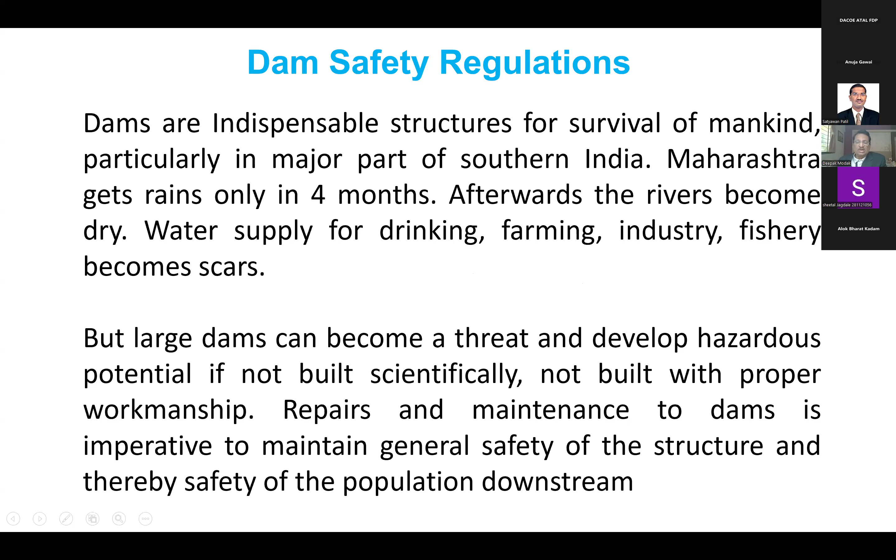So far as Maharashtra is concerned, the Dam Safety Organization, DSO, situated at Nashik, headed by a chief engineer, is a crucial part of Maharashtra's Water Resources Department, operating under the Chief Engineer, Hydrology and Dam Safety, at Jalavidnyan Bhavan, Dindori Road, focusing on inspecting large dams, analyzing safety measures and safety measuring instruments, and developing emergency plans to ensure water security and public safety.

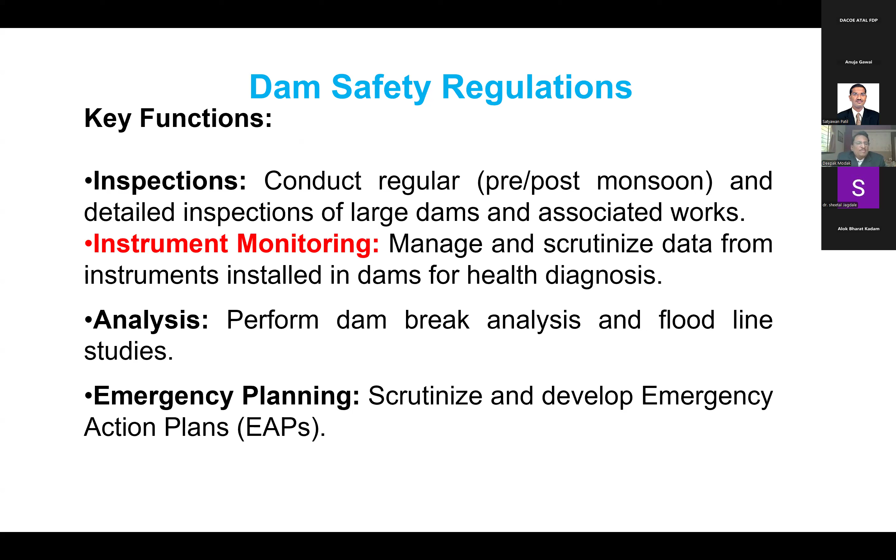The key functions are: inspections, that is, conduct regular pre and post monsoon and detailed inspections of large dams and associated works. Then instrument monitoring, that is, manage and scrutinize data from instruments installed in dams for health diagnosis. Analysis, perform dam break analysis and floodline studies. Emergency planning, scrutinize and develop emergency action plans.

So dam break analysis predicts the devastating flood wave from a failed dam, involving simulating the dam's breach size, shape, timing, etc., and routing the resulting outflow hydrograph downstream using software like HEC-RAS to create inundation maps, assess risks, and develop emergency plans.

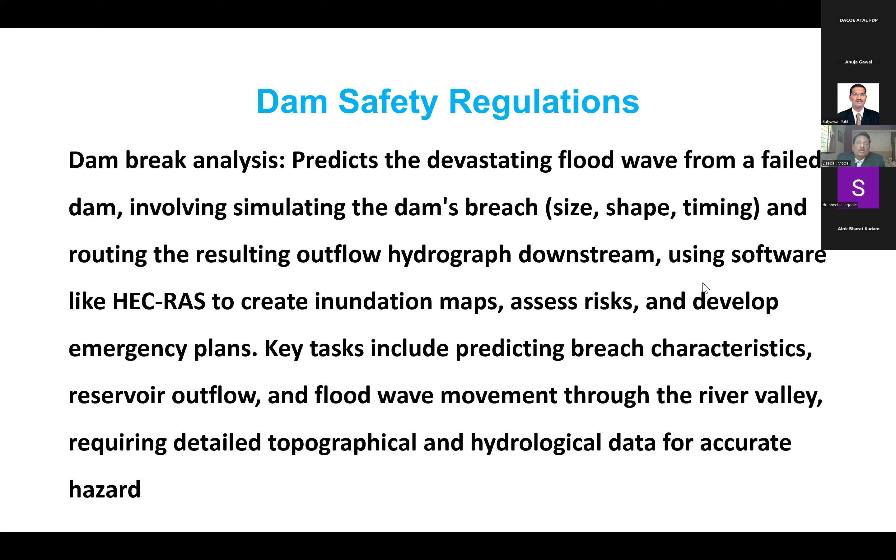Key tasks include predicting breach characteristics of reservoir outflow and flood wave movement through the river valley, requiring detailed topographical and hydrological data for accurate measure of the hazard. The Dam Safety Act, now particularly we would discuss about this.

The Dam Safety Act 2021 is an Indian law established to ensure the safe functioning of dams by providing for their surveillance, inspection, operation, and maintenance, preventing dam failure disasters, and creating strong central and state level institutional framework, including the National Dam Safety Authority, NDSA, and state dam safety organizations, SDSO, to enforce standards and policies.

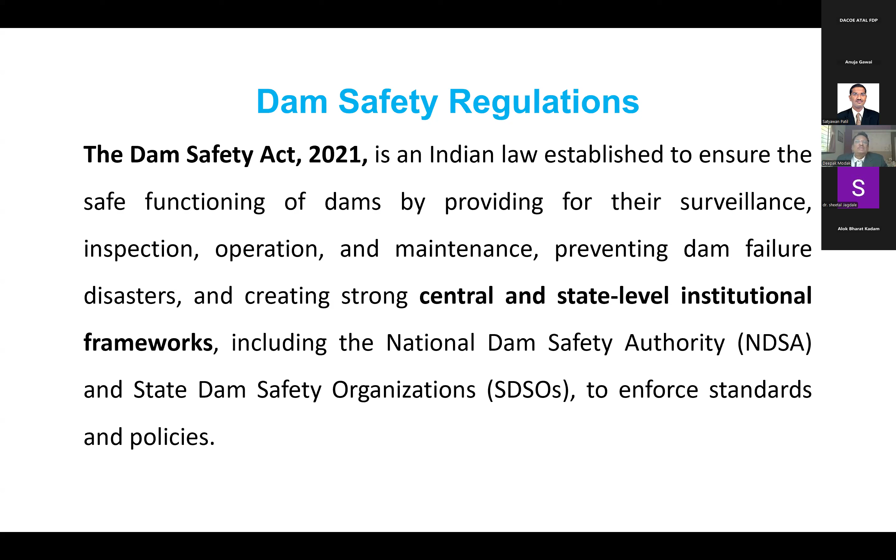The act was enacted in December 2021. It mandates owners to have operation manuals, emergency action plans, and outlines roles for national bodies like the National Committee on Dam Safety, NCDS. State level committees on dam safety oversee state dam safety. The State Dam Safety Organization, SDSO, conducts surveillance, inspection, and monitoring.

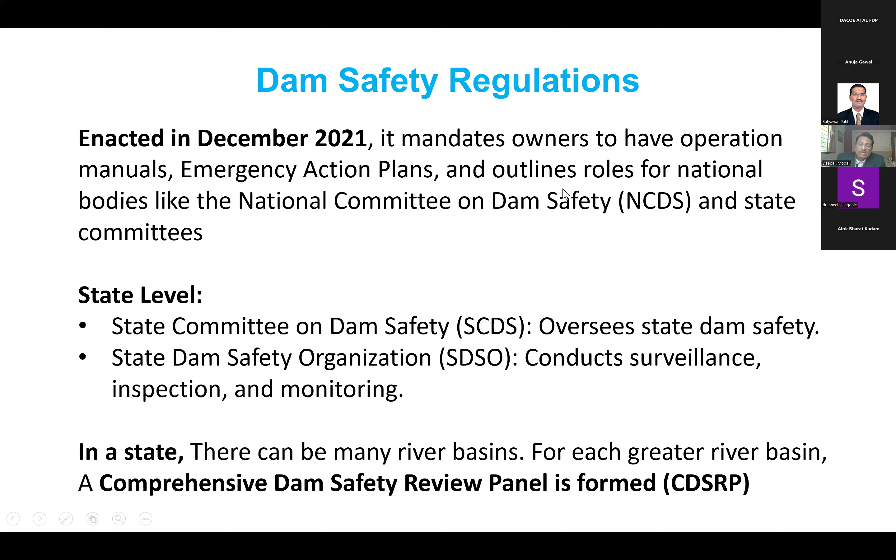And in a state, there can be many river basins. For each river basin, a comprehensive dam safety review panel is formed, that is CDSRP. So river basin corporations: there are 6 river basins in Maharashtra, namely Krishna, Godavari 1 and Godavari 2, since Godavari basin is very large, starting from Nashik and downwards, then Tapi, Konkan, and Vidarbha. For each corporation, a separate CDSRP is formulated, particularly for Maharashtra Krishna Valley Development Corporation.

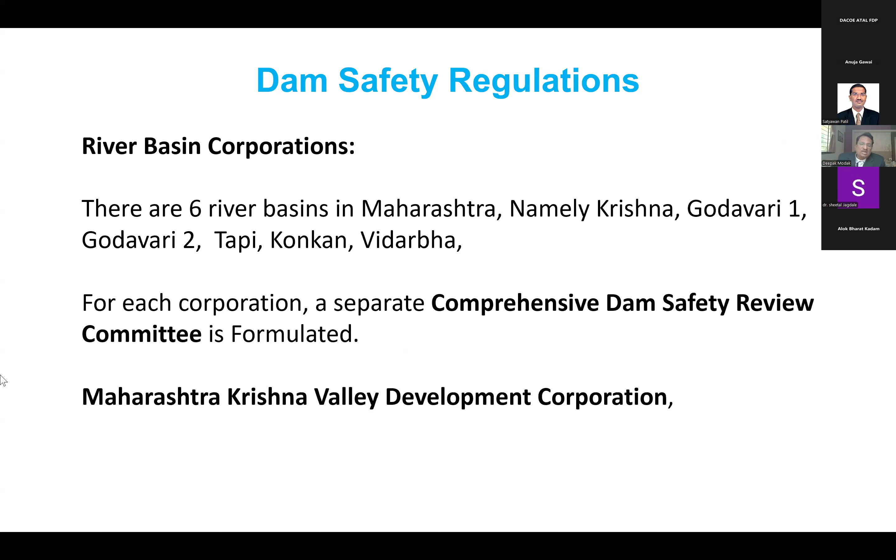For Maharashtra Krishna Valley Development Corporation, the CDSRP is chaired by Shri D.N. Modak, that's me. I.S. Chaudhary, retired chief engineer, is a member. Dr. Sharad Govind Joshi is a former principal of Bhoomaraddi College, Hubli, and he was also associated with Koyna project when we did the strengthening of the overflow section. He was working as executive there.

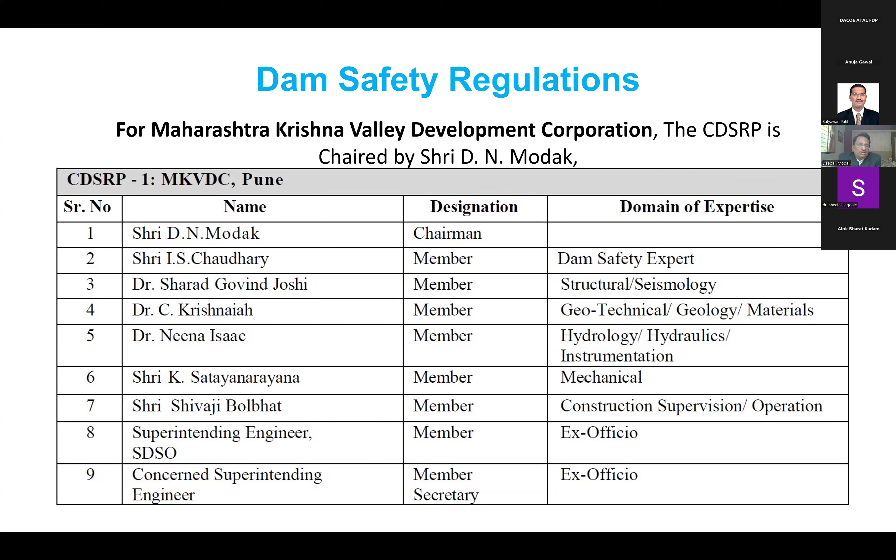Dr. C. Krishnaiah, geotechnical and geology. Dr. Neena Isaac is hydrology and hydraulics. Shri Satayanarayana is member mechanical. Shri Shivaji Bolbhat, again retired chief engineer of our state, construction supervision activity. Superintending engineer SDSO ex officio, and the concerned superintending engineer of the dam for which we are going for inspections will be the member secretary.

So what are the dam safety regulations? Safety is a concern of large and specified dams. Now, what are specified dams? It is clearly mentioned in the Act. As per Dam Safety Act 2021, any dam over 15 meters high is termed a specified dam. Also if crest length is greater than 500 meters, reservoir capacity is more than 1 million cubic meters, maximum flood discharge is greater than or equal to 2000 cubic meters per second, or it has difficult foundation problems or is of unusual design.

Now I have added one more category, that is, it has a high hazard potential. I will quote the example of the Thoseghar MI tank, which does not meet any of the criteria mentioned above, but there is the Thoseghar waterfall near Satara, and in monsoon many people come to visit this waterfall, and, sorry to say, drink and do funny things, and they encroach into the Thoseghar spillway.

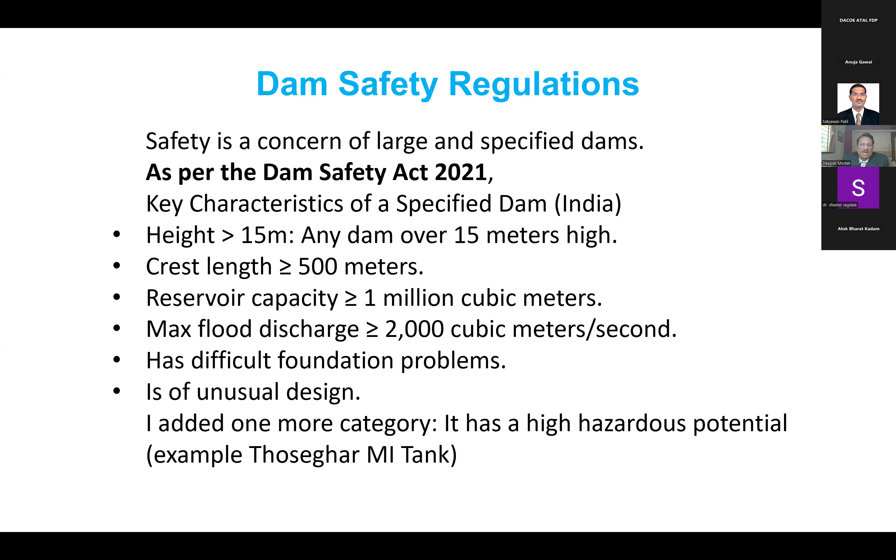As per different categories of dams like major, medium, minor, or small dams, the Central Water Commission has specified at least 2 inspections of each dam annually, that is pre-monsoon inspection and post-monsoon inspection. The inspecting officer is specified as per the category of the dam. The dam can be an earthen dam with central spillway, side spillway, or separate saddle spillway. It can be a concrete dam, a masonry dam, or a composite dam.

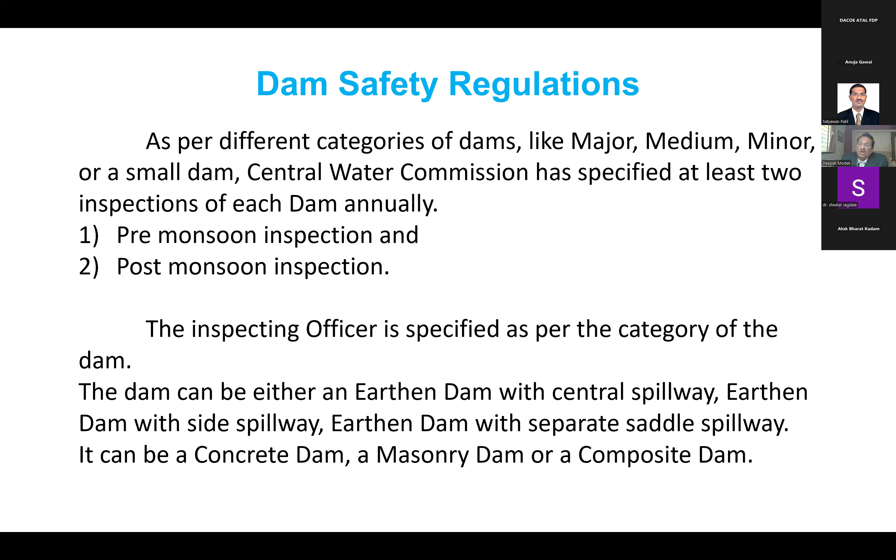So as per its type, the following components are necessarily inspected. Downstream drainage. Now downstream drainage means surface drainage, cross drainage, and toe drainage. The surface drainage here, I mean, is the rainfall drainage. That is, in the rainy season, the rainwater should safely be drained from the downstream drainage. For that, longitudinal and cross sloping drains are constructed.

There should not be any vegetative growth. There should not be any obstruction like fallen rocks or other debris. They should be flowing freely and draining the surface water in the rainy season or during heavy storms and heavy floods.

Then surface drainage on the downstream slope. This is specific. Even in the rainy season or after the rainy season, you should not see any wet patch or any water flowing out of this downstream slope from any jet or any stream. If you see it, you know there is a piping phenomenon taking place in the embankment. So you should take care of that. So this downstream slope drainage is different from the downstream surface drainage during the monsoon.

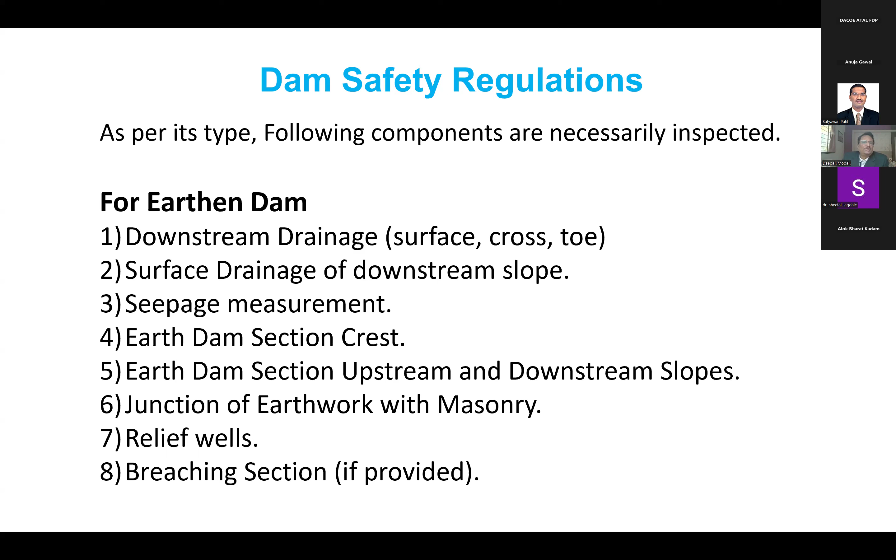And a breaching section. Everybody being from the engineering faculty, you know what a breaching section is. You must inspect it every time you go, that it is intact and its level is properly maintained. Then for gravity dams, keep a watch on foundations from the foundation gallery or exposed rocks downstream. There should not be any cracks or oozing or such deformations seen in the foundation.

Then the body of the wall of the NOF, non-overflow dam, and spillway. This spillway has got non-overflow sections on both sides. So we must see that there is no water jetting out, no bulging or anything like that, and no cracks are seen. And the structural performance of the NOF and OF portions of the dam and foundations.

Spillway gates. You should check the rubber seals, trunnion, chains, ropes, whether they are properly greased or not, and that they correctly open and close. This is, of course, a ritual practice of inspecting the gates every time before pre-monsoon inspections. You should have a separate generator provided in case of power failures. Then the spillway bridge, hoist bridge, trunnion level bridge and catwalks. They should be intact and accessible. The inspecting person should reach there and view the components.

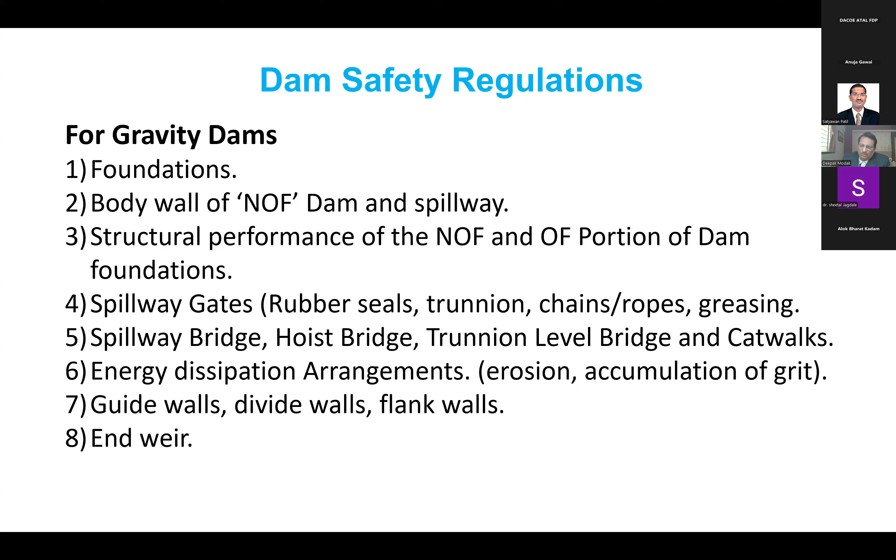So we make it a point that every 3 years, this stilling pond is totally drained and it is inspected and videographed again. And then if any abnormal erosion is seen, then we take care of repairing those. So few dams have a few specific problems, so we must take care of all that. So hydraulic performance of energy dissipation arrangement should also be observed.

Instrumentation installed and observations. So what normally instrumentation we should see on old dams, particularly the new dams, if they are gravity dams or the spillways of masonry or concrete type, we have thermometers and all, stress and strain meters, but they have significance for the first 5 to 6 years. Afterwards, the temperature in the body of the dam is maintained, and we should not bother about that.

But for regular inspection, we should take care of the tilt meter, which shows the tilt of the dam. You know, when the dam reservoir is full, the dam has a tendency, if it is an elastic dam. I'm not speaking about the earthen dams or plastic dams. The elastic, that is masonry and gravity and arch dams, we don't have any arch dam. So masonry and concrete dams.

So they have a tendency to bend slightly, tilt downstream when the reservoir is full, and bend slightly backwards when the reservoir is empty. So this allowance of the tilt is measured and is specified. So you should not see any additional tilt in the tiltmeter during the monsoon or even in the dry season. So this record is permanently maintained and the tilt meters are permanently repaired and maintained. Then instrumentation,

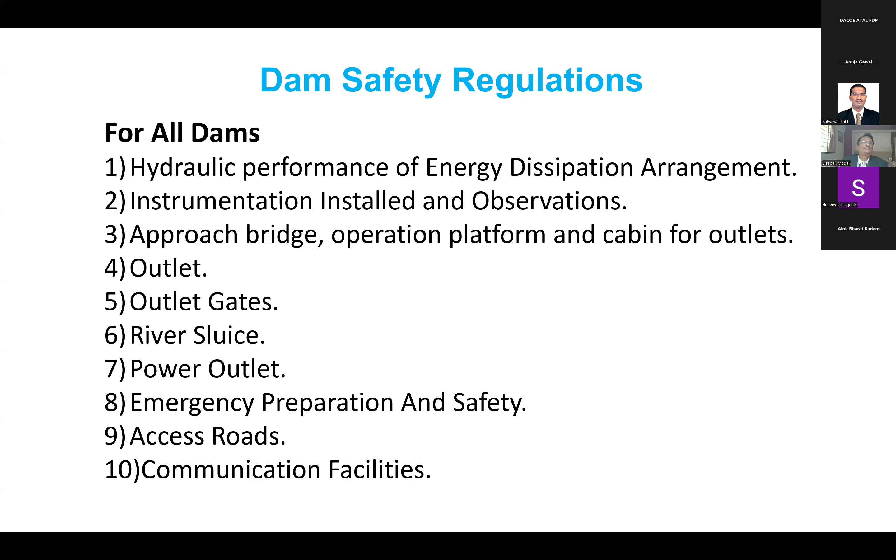Then hydraulic risk assessment, I will come to this now, the second part of our lecture. All dams during the design phase are designed for all sorts of hydraulic risk resistance. Everybody knows about it. So there is hardly any problem arising out of hydraulic risk. The hydraulic risk for dams arises only during exceptional flood conditions. Similarly, during high floods, the population downstream on the river banks is also affected. This is because of the following factors.

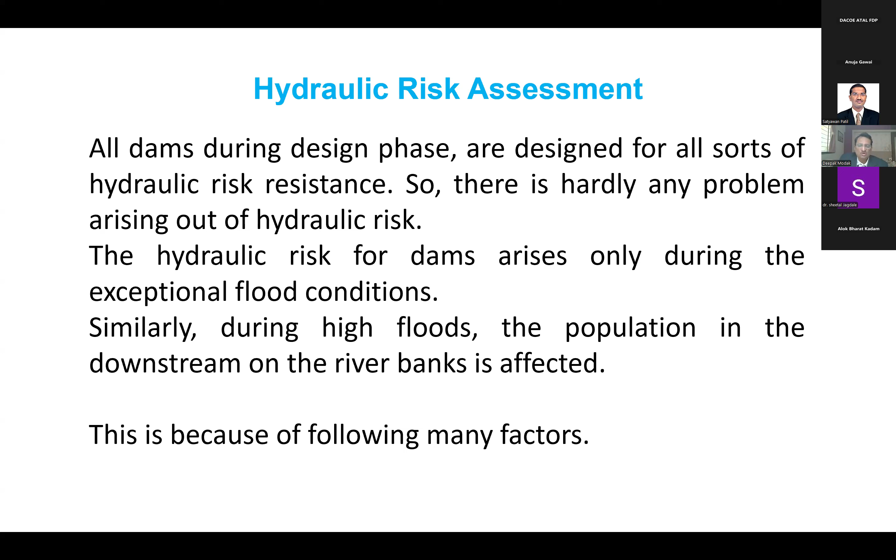So hydraulic risk assessment: if participants are from Maharashtra, just a month ago I had written an article on being prepared for the floods, or in Marathi, Purasati Susajjata. It was published by Maharashtra Times. If many of you have read it, these contents are included in that. For those who have not read it, it will be a new thing.

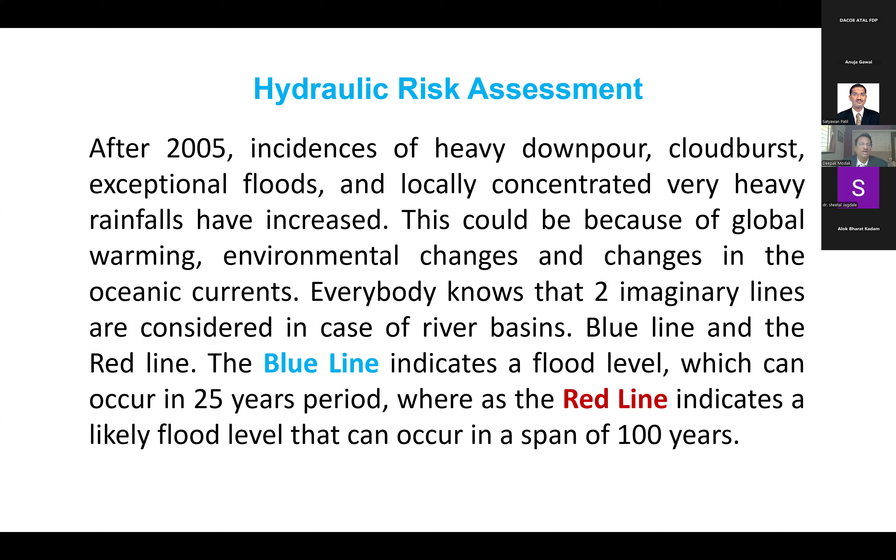After 2005, incidences of heavy downpours, cloudbursts, exceptional floods, and locally concentrated very heavy rainfalls have increased. This could be because of global warming, environmental changes, and changes in oceanic currents. Everybody knows that two imaginary lines are considered in river basins, the blue line and the red line. The blue line indicates a flood level which can occur in a 25-year period, whereas the red line indicates a likely flood level that can occur in a span of 100 years.

The lines can never be permanent, because every time there is a revision of marking these lines, the levels will change. If you consider a span of 25 years which falls 100 years back from now, there was less population, less congestion of residential and commercial buildings. Farming was limited to certain farmlands and not encroaching on the river banks. There was a lot of vegetation on the banks, and the roots used to hold the soil mass on the bank, so soil erosion was less.

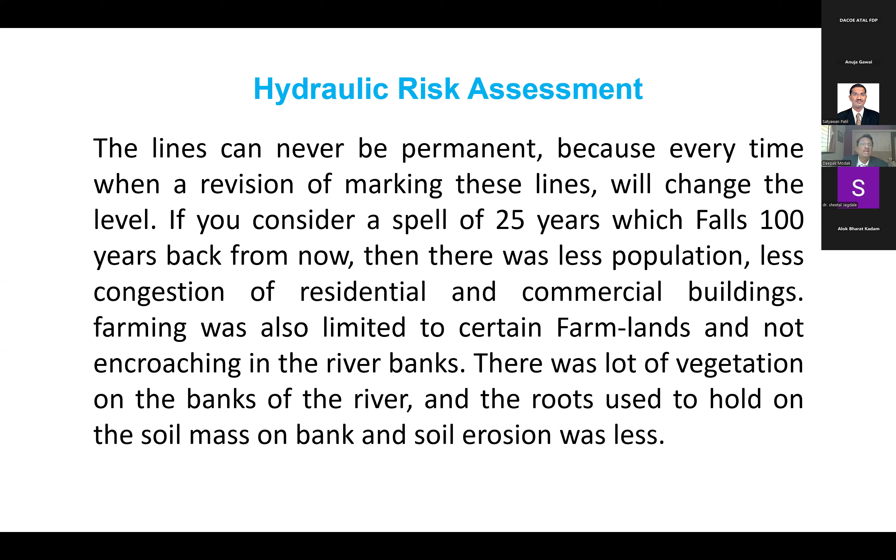Now, if you consider the last 25 years, everything has changed. Growth in population, growth in buildings, construction, encroachment on the river banks, deforestation and erosion of soil mass, farming and gardening on the river banks, deposition of debris generated through new construction, leveling of plots and all. It has reduced the waterway and hence flood levels are rising all the time. This has a large effect on the blue line, though the difference will be slight in the red line.

Now, I must mention one more thing: communication routes and bridge building have also increased in the last 25 years. The bridges and the road embankments have created obstruction in the natural drainage of the land. And for bridges, if the waterway is not calculated correctly, or not calculated for a 1 in 100 years or 1,000 years flood, it is definitely going to create a bottleneck in the river flow. And this will again affect the flooding conditions.

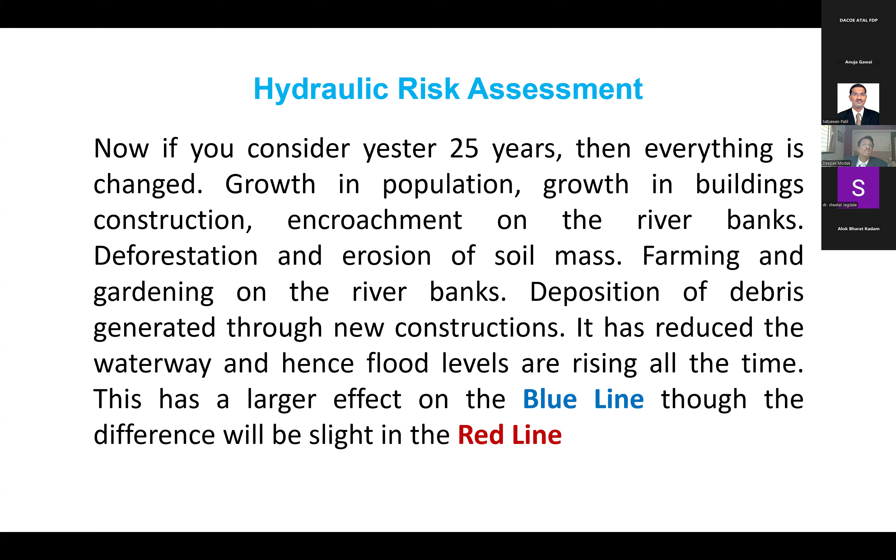Common people have a notion that the blue and red lines are generated through vindictive considerations and manipulated as per political will and pressure from the builder lobby. Yes, the builder lobby always has pressure, because they want to build and we object. But the fact is these lines are decided on statistical data, and they cannot be changed, lowered or raised at anybody's whim.

Unauthorized building of residential and commercial complexes below the zone of blue and red lines, and farming on the close bank of the river, will definitely increase the risk to the health, wealth, and lives of the population in general. Particularly, since we are talking about Maharashtra, if you see on the banks of the Krishna, Panchaganga, and all these rivers, we have built many Kolhapur type bandharas. And farming is allowed on the banks of the river by lifting water from the Kolhapur type bandharas.

So farmers have encroached on the river. I have seen this on the banks of the Karha, Nira, and all such big rivers, that farmers create lands by depositing material imported from outside, and they reach up to the banks of the river and create farms, and particularly they grow sugarcane on the banks. And what happens when the flood is passing?

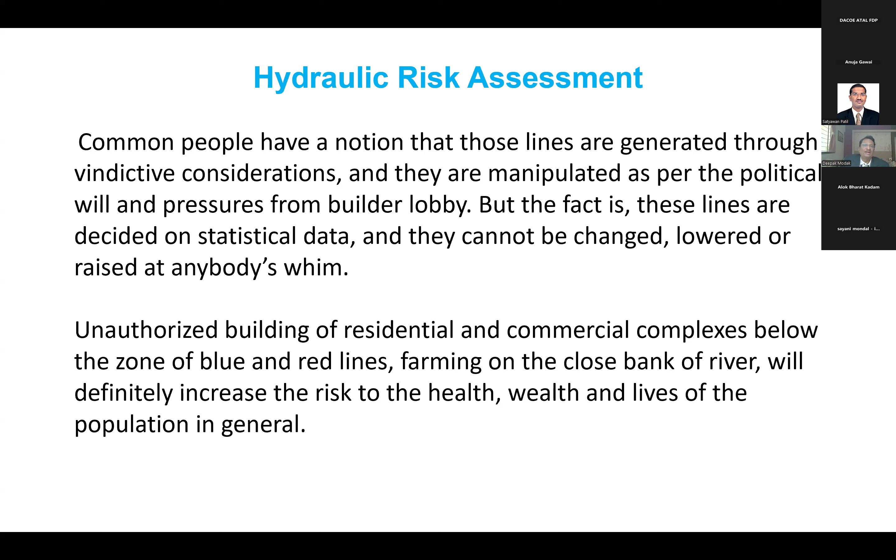Of course, to control the releases of flood from the dam, there is a definite science known as the reservoir operation schedule. This tells the engineer in charge about the levels to be maintained date-wise throughout the water year of a particular dam, particularly in monsoon season, not afterwards. But afterwards, yes, when the dam is multipurpose, you should not allow excessive water to be used for power generation, irrigation, or drinking, because there are reservations.

Accordingly, you must know how much release should be there from the dam every month, every 15 days, and you should keep a watch on this reservoir operation schedule. So this is prepared on maximum available rainfall data of a particular dam catchment. On this, assuming a 75% dependable yield and 90% dependable yield for every 10 to 15 days, the water contents of a dam are derived.

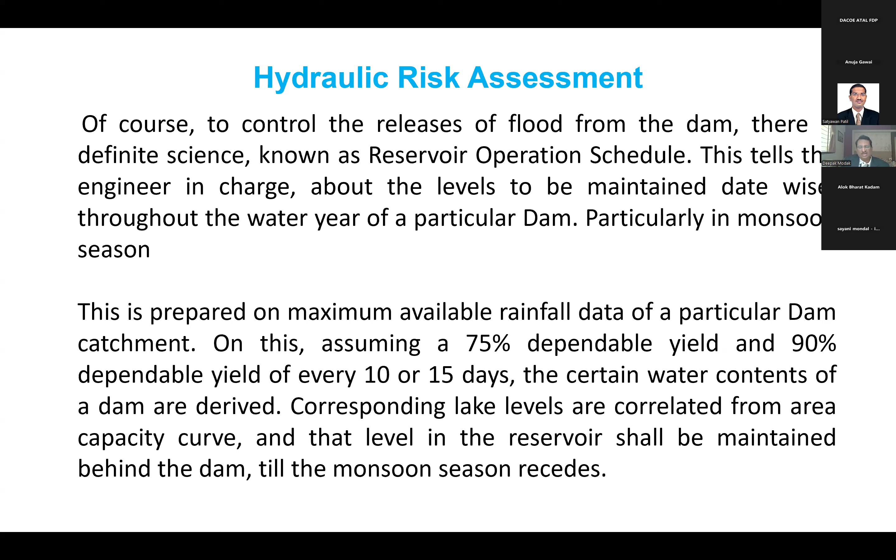Corresponding lake levels are correlated from the area capacity curve, and that level in the reservoir shall be maintained behind the dam till the monsoon season recedes, and again after the monsoon season as well. So these are the general zones considered in the dam when you should be particular.

Dead storage, you don't bother about that. It is specifically meant for accumulation of silt over 100 years. So we even keep the control gates above this level. So this dead storage is dead storage. We don't have to worry about that. And it is there every year.

Then the buffer zone. The buffer zone normally is a carryover which we specifically maintain at the end of May or the end of summer, because it's likely that many times the monsoon does not start in time in June. Nowadays particularly it starts in July. So you must take care of the water supplies required for everything, for farming, for drinking, for industry, and all.

And you must keep a definite reserved water quota for June up to 15th of July, I will say. So you should be able to supply water up to 15th of July if the rains don't start and the inflow is not established. So this much water you must keep. Then when the inflow actually starts coming, it is the conservation zone where we must store the water, irrespective of how much inflow is coming. So we don't have to bother about the levels till now.

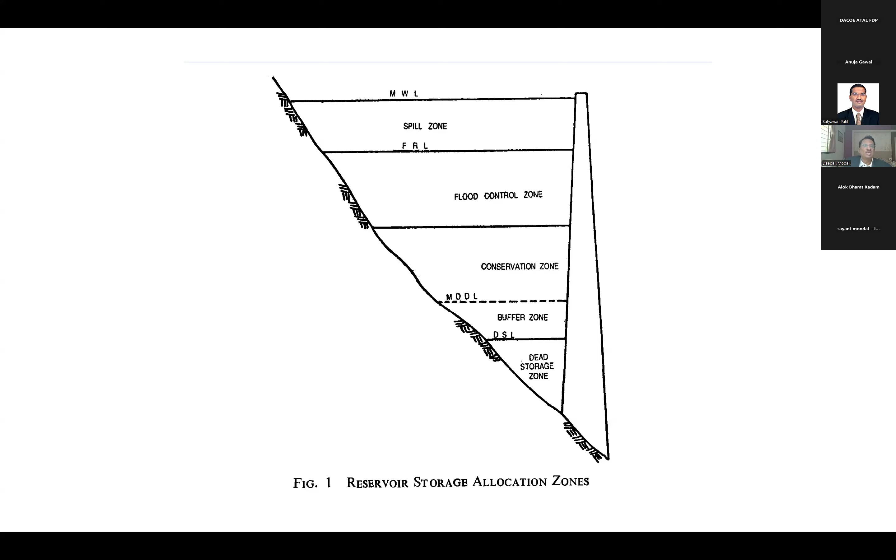So during 2015, the latest ROS of Koyna Reservoir was formulated. It was formulated by me, considering rainfall data from 1962 to 2015, 53 years. It is shown below. So this is just academic information.

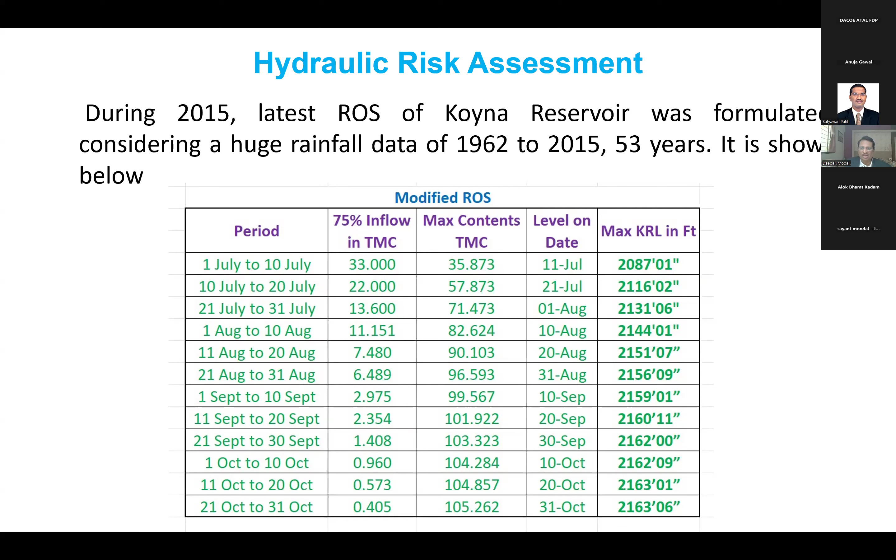But from 1st July to 10th July, some certain level should be maintained. So up to 21st and 31st of October, this level shall be maintained. That is the maximum full reservoir level, 2163. Now, it is not possible to stick to a designated level in every year, because this depends on how the rainfall pattern of a year is.

That is, if the predicted rainfall in a year under consideration is less than average, or say equal to average, the levels are reached late or as per schedule. So the officer in charge does not have to bother about the water levels. But if the rainfall is more than average, then he has to manage the water levels up to the stipulated water levels. And this is achieved by early releasing water from power sluice and river sluice if needed.

So even in Koyna, we request the generating authority to release waters through power sluices and generate. But in the rainy season, there is no demand for power. So Mahagenco is reluctant to generate in the rainy season because they want to conserve the water, the quota allotted to them for the dry seasons, because the demand of power is high in those months, particularly from January to May. So they are reluctant, but we must force them: to maintain the level of the reservoir, you must release some water.

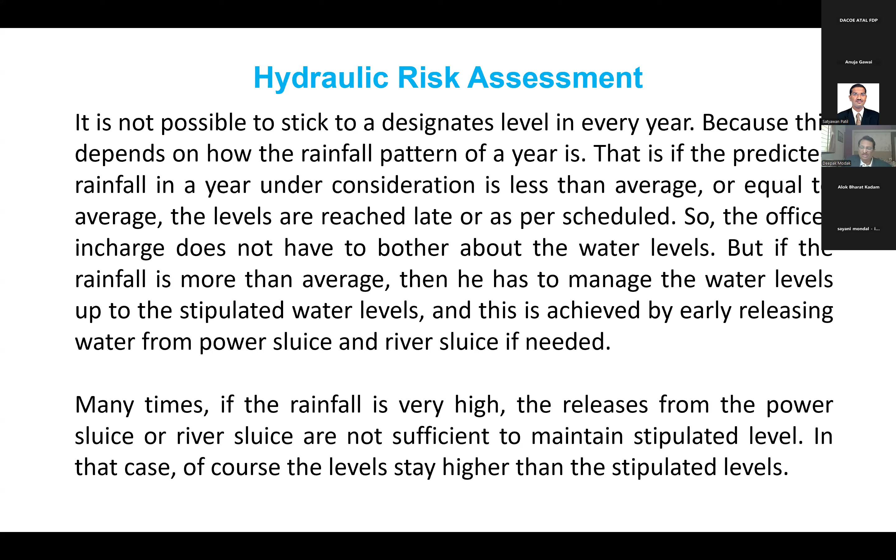And we release water from these, as I said, power sluice and river sluice, but that release is very meager. So you cannot control the heavy floods if they come, and you are helpless, and the water level reaches above the stipulated level. So many times, if the rainfall is very high, the releases from the power sluice or river sluice are not sufficient to maintain the stipulated level. In that case, of course, the levels stay higher than the stipulated levels.

So for every dam, two curves are plotted, of date to reservoir level. One is said to be a good year curve, and the other is said to be a bad year curve. The bad year curve is the lower one, because when the year is bad, the levels are reached late. And the good year curve is a normal or just above the normal curve.

So the level shall be maintained between these two curves. The operating engineer takes care of this as far as possible. If not, then you don't have any control when it is a very heavy downpour, like say this year or in 2005, 2006, 2019, 2021. So it should be borne in mind that until the reservoir level reaches the crest of a gated or non-gated spillway, nothing is in the hands of the engineer in charge, because you cannot release sufficient water from sluices. So let us wait until the water comes to the crest.

But once the reservoir level reaches the crest level, then there can be a control on the releases of flood water. If the dam spillway is ungated, then the engineer in charge can do nothing but see the flood spill over the spillway. So what the engineer in charge can do is just sit in his cabin, have a cup of tea or coffee and watch the spill going.

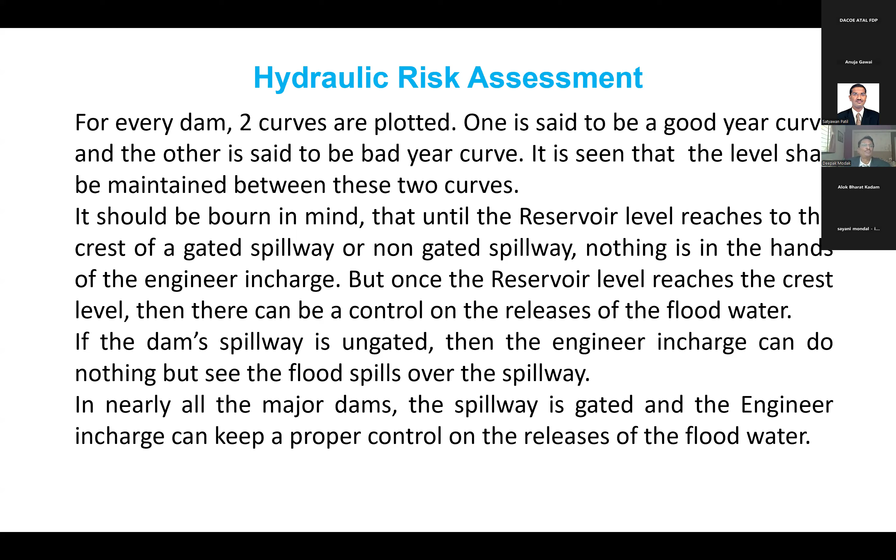But normally in Maharashtra or anywhere, large major dams which have a major hazard potential are always gated. In nearly all the major dams, the spillway is gated, and the engineer in charge can keep a proper control on the releases of the flood water. When the reservoir level reaches up to the crest level, the engineer in charge keeps on calculating the inflow, either by empirical methods or by measuring the water levels in successive time periods.

For many years, when I was superintendent engineer and chief engineer of the Koyna project, measuring the water levels in successive periods, it was observed in the case of Koyna Dam that when a rainfall of 1 inch occurs at Mahabaleshwar, then after 6 hours, 0.6 to 0.7 TMC of water flows into the dam. From this, a fair idea of the likely flood coming into the dam within 6 hours can be calculated.

So, in 24 hours, there is a rainfall of say 500 mm, that is say 20 inches or something at Mahabaleshwar. Then how much inflow is going to be there?

So 20 into 0.7, so it is 14 TMC. So 14 TMC of water is going to come within 6 hours in 24 hours. So that we know. So from this, a fair idea of likely flood coming into the dam within the 6 hours can be calculated. Otherwise, if rainfall is scattered throughout the catchment area, then the engineer observes the water levels

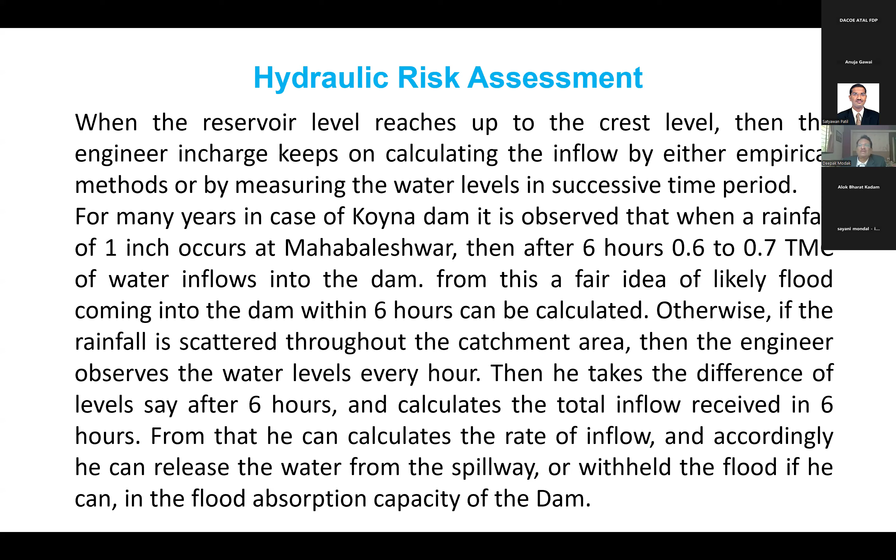Generally, the height of the gate is around 5 meters, and thus the crest level is 5 meters lower than the full reservoir level. So the engineer in charge has sufficient time to monitor the levels in this flood releasing zone. But if the reservoir has already reached the FRL, this is a crucial condition: the monsoon is over, 30th September has passed, 15th of October has passed, and the dam level is full as per your reservoir operation schedule.

But if the reservoir has already reached the FRL and then late monsoon occurs, and this happens nowadays every time, then the inflow cannot be retained behind the dam and has to be released in the river. While releasing the flood, a watch shall be kept on the main river downstream so that heavy floods do not inundate the properties of the residents downstream. For this, flood monitoring units are established at crucial spots on the banks of major rivers, and from them, using real-time data, different dams are directed to release measured flood through the spillways.

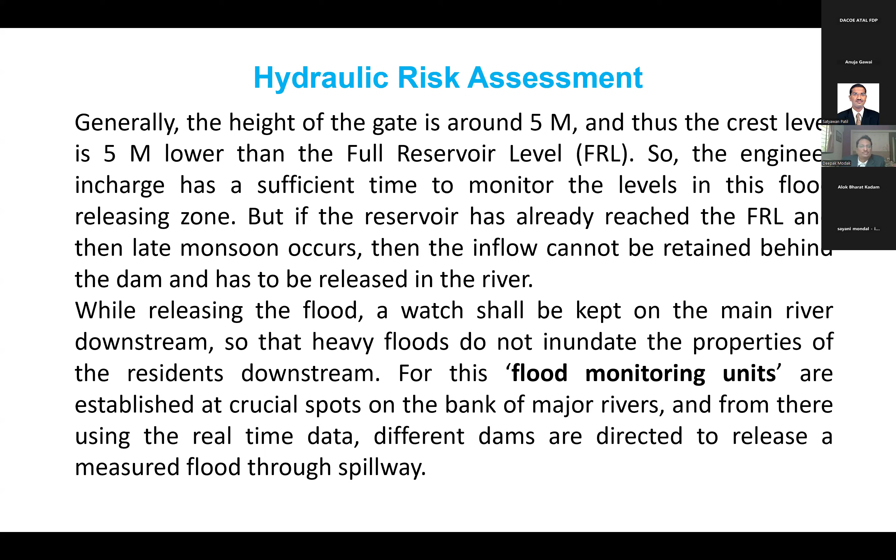So they are operating 24 hours in the monsoon, and they are connected through computers, VSATs, wireless and even mobiles. So the on-spot judgment of the engineer in charge is very crucial. If, considering the risk of anticipated floods, he maintains a lower level and starts releasing floods in advance, and the monsoon suddenly recedes, then the reservoir does not fill to the FRL. On the other hand, if the rainfall is normal and by the end of the rainy season the reservoir is full, and the return monsoon brings heavy rainfall and creates floods, then the flood cannot be retained behind the dam, and there is no control on the floods occurring downstream.

I say this every time. I have every time published through media, and even on videos, on TVs and networks, that you don't blame the dams for the floods. I specifically mentioned that, considering the Sahyadris, only 15% of the catchment of the Sahyadris is stored or blocked by the dams.

The rest, 85% of the free catchment area, straightway drains into the Krishna basin or Bhima basin or whatever it is. So the dams are no way responsible for the floods occurring in those months, because the free catchment also drains for 85%. Fortunately, in the earlier months of monsoon, say July, August, the dam has not reached the crest level. So even though there are floods, they are not released into the river, but they are stored behind the dam. And thus, a natural control on the floods is occurring due to the dams.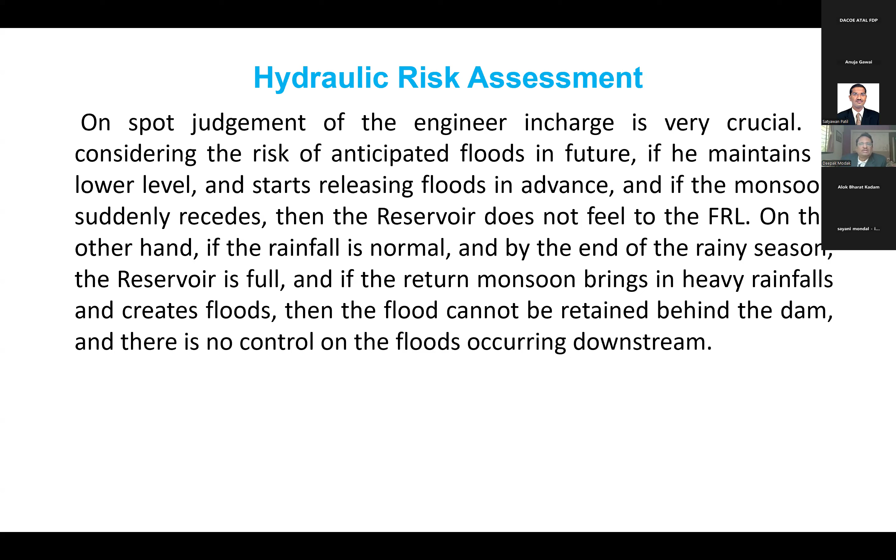Nowadays, the monsoon status is watched by satellites, and a fair idea of percentage rainfall is known. And from time to time, real-time warnings of concentrated rainfalls and alerts are broadcast, and thereby the engineer in charge can stay alert and make good decisions.

The new software like HEC-RAS, MIKE 11, RIBASIN can predict nearly correct water levels in the valley occurring due to certain releases from the spillways and from free catchment areas, and can help the revenue authorities and population downstream to be alert and shift their belongings in time to safe places, thereby reducing the risks.

Particularly, we observed this when we were monitoring the flood of Chiplun in 2021. I was the chairman of the study committee, and people were blaming the powerhouse, Alore powerhouse, for releases and causing the flooding. Funny thing is, 250,000 cusecs flow was flowing through the Vashishti river and Jagbudi river, and how much maximum discharge can the Kolkewadi powerhouse release? You know, it is 11,000 cusecs only, as compared to 250,000 cusecs of water in the Vashishti river.

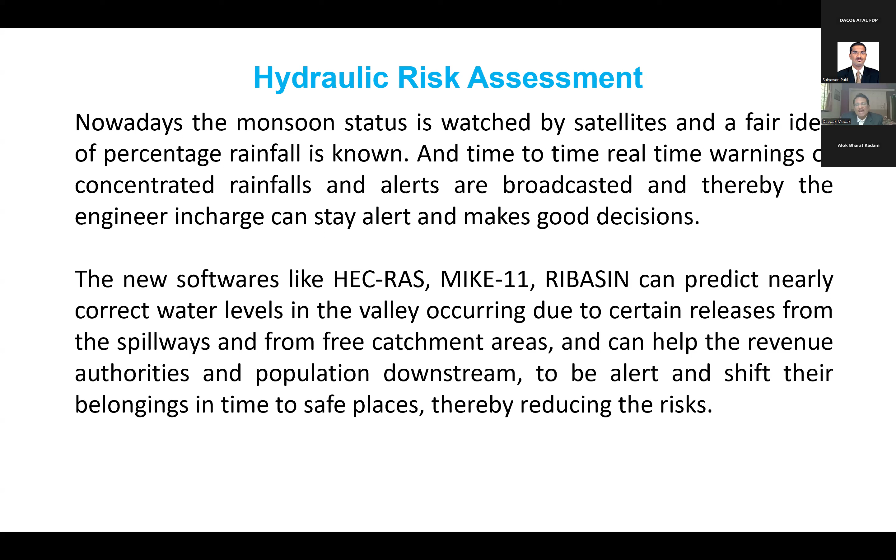So these things can definitely help the managing authorities of the dams, reservoirs, and powerhouses as well. And then they can manage holidays to the thermal generating powers, nuclear generating powers, and utilize the hydro potential during monsoons if the prediction of monsoon is high, particularly in that area. And then the risk management of the people downstream of the dams can be handled correctly.